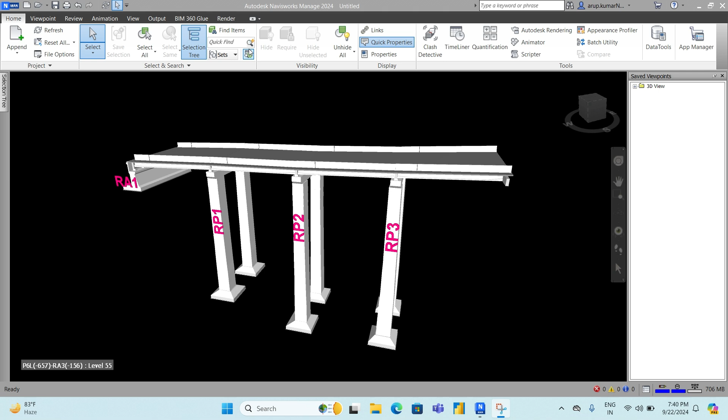You can find any element by the find toolbar. Go to home and find items.

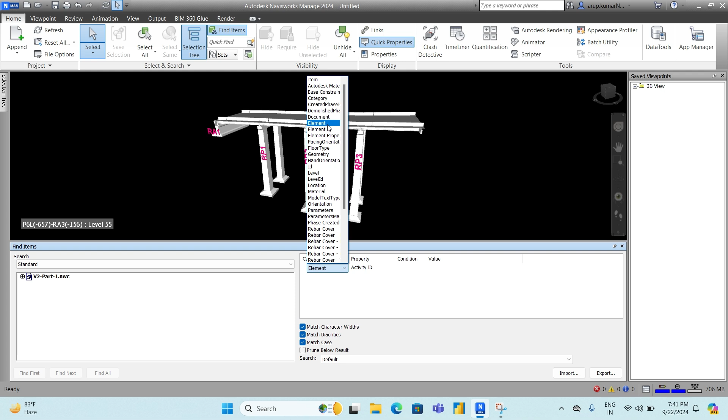Here, in category you can select category, item, element - a lot of options here to select. So if you select element, then you can select activity ID, area, or elevation - everything you can select here.

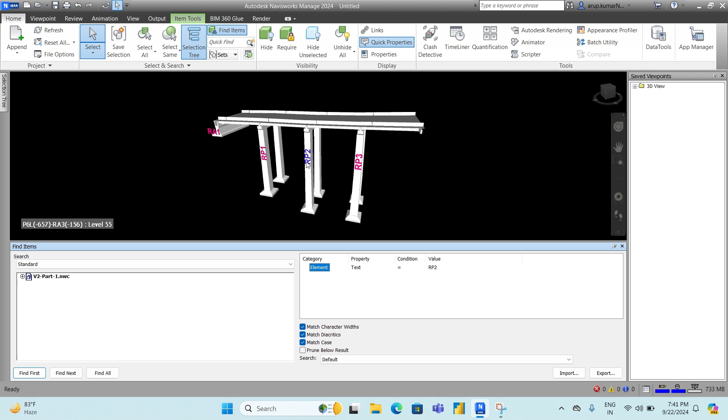So if I select text, and condition equal, and the value RP2, and find next, then you can see the RP2 text is highlighted in the model.

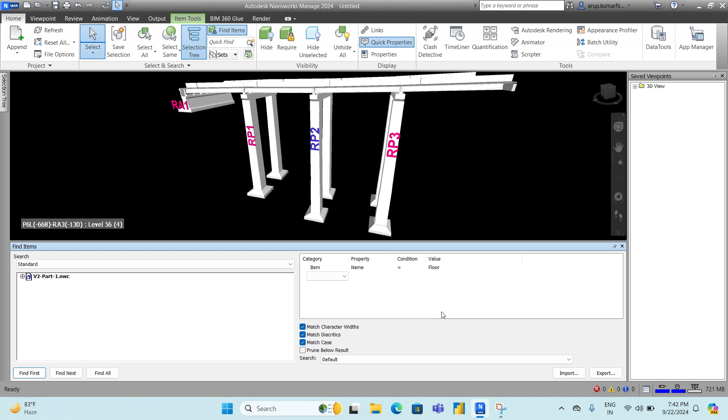Then, if you change the category as item and property as name or something, condition equal floor, and find first, you can see the slab selected in 3D.

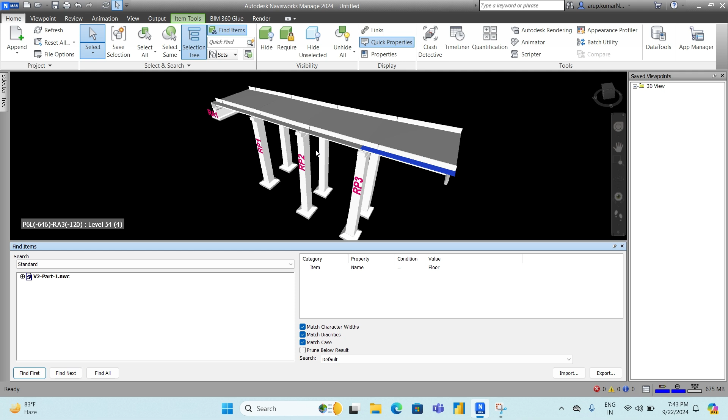Then you can select the next one by find next. In this way, you can find and select any element in 3D.